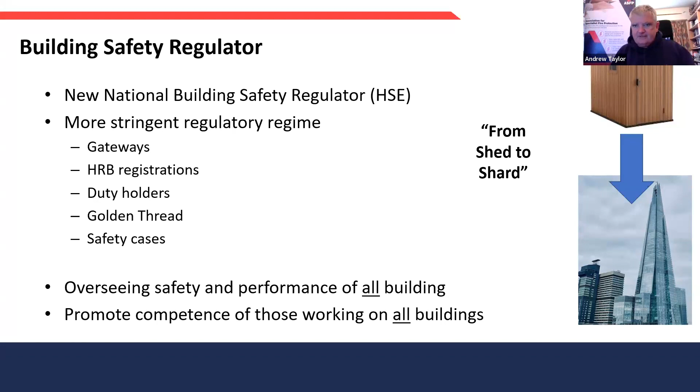The recent stuff government came out with in support of HSE was about the late teens of August. A lot of the secondary legislation that underpins the building control framework for new high-risk residential buildings has come out: the management of safety regs, the high-risk building procedures regs, and various amendments to building regs, all published with a view to going live as of the 1st of October.

They're also going to be putting new things in place for building inspectors, new provisions as we transition fully over to this new system.

So let's remind ourselves, and I hope none of this comes as a shock to you, what the Hackitt gateways look like. There are three key gateways that we have now.

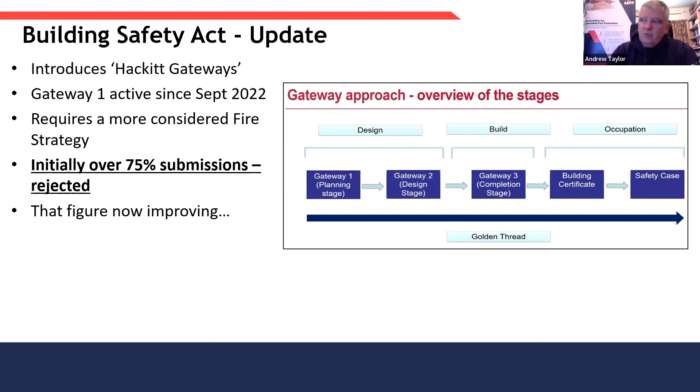So that's good. Moving on, what will now happen as of October is that Gateways 2 and 3 go live, remember this is for the new regulatory framework for high-risk residential buildings. Gateway 2 requires that full plans are laid down, so it requires a detailed design. With the conversation we had, this was RIBA stage, in effect RIBA stage 4.

So a detailed design needs to be done before you get permission to construct. Gateway 3 is a check that what you designed at Gateway 2 is what you built at completion, which is permission to occupy.

Now, the fundamental thing here: the fundamental legal requirement to build a safe building hasn't changed. How you build a safe building, what that safe building looks like, hasn't changed. What's changed is the route you need to go down and the method you go through the process to get to that safer building.

Okay, so there's no fundamental change to legal requirements, but what we're going to have to do now is do more detailed designs and lodge them with HSE to get through Gateway 2, and then have HSE involved in that conversation as we go through construction to get to Gateway 3. And the secondary legislation to make this happen was finally published on August 18th.

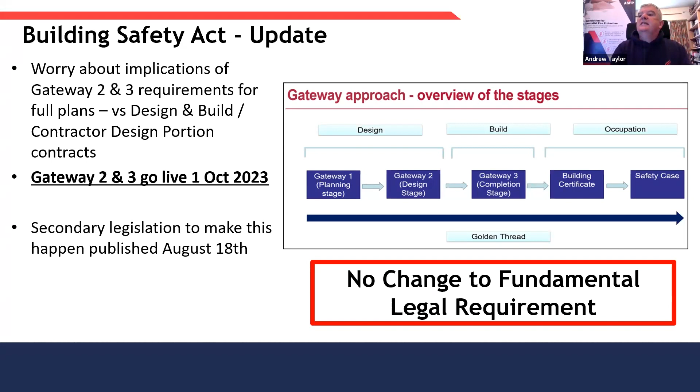I wouldn't necessarily suggest you go off and read the secondary legislation. It's quite detailed, it's quite dry. But HSE have published, and I often talk about this and recommend to people, HSE has a building safety web portal. They put a monthly e-bulletin out to explain what's going on and where we're up to with the process, and links to all their guidance.

And at the same time as government produced the secondary legislation, HSE produced this document here, an overview to Gateways 2 and 3. It's about a 20-page document, and it's a more interesting and maybe a better read than trying to go through the regulations themselves.

So Gateway 2 requires the client and designer to submit full plans for high-risk buildings, and once HSE has checked, and there's timeframes involved for that, you get permission to construct.

The construction phase needs to have an ongoing dialogue between HSE, client, and principal contractor. And there's a fundamental note here: major changes to your design, you have to stop and get them approved by HSE before you carry on with that construction.

And here's a couple of examples in the document here as to what might provide a major change in design: it's changing compartment size or changing your structural model.

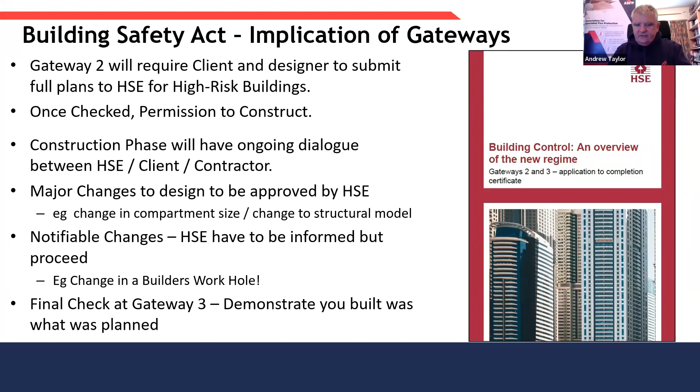Obviously, the less you change, the more you plan forward, therefore the less you need to change, therefore the easier you're going to get through Gateway 3. Sounds very simple, that. I'm sure it's not.

And that takes me to poll question 2: are you ready for Gateways 2 and 3? Let's see how that one fares.

So looking at that, it's a nice, fairly even split between not applicable, that we don't work on relevant buildings, and yes, they're putting steps in place to deliver the necessaries. Although 11% think we could have done with more notice, and I must admit, we could have done with this. It'll be interesting to see how this all evolves.

Interestingly, the Irish building regulatory system already has a lot of this in place, and it was actually put in place in 2014. But it took them a number of years to wash through how this would actually work and how this would unfold going forwards.

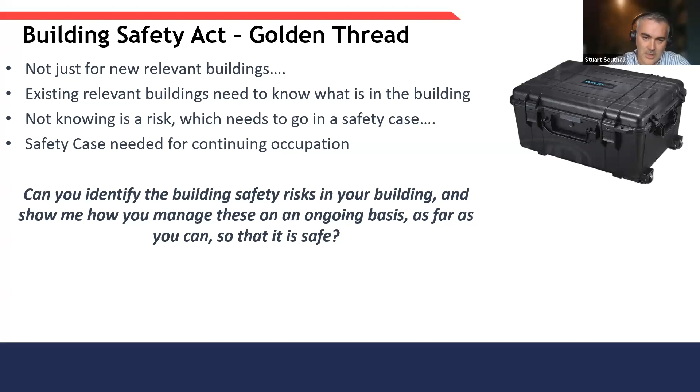Okay, so like we say, those first three points are the same. So the challenge: even buildings built in the 2000s have lots of missing Regulation 38 information. We've seen it with the schools, with claddings, etc. There are other issues out in the marketplace. Let's find that information out. Let's record it in a way that is accessible very quickly.

So if you've got that information available, you can make quicker and easier decisions to make buildings safer again. Where information is not available, you will have to show what you have done to find it. If you have problems with your safety measures, review and amend your maintenance regimes. It is important you keep this in mind as your building ages and equipment and technical progress develops.

People going in, putting cables through fire stopping systems that have been established - that kind of example, it's continual. The golden thread doesn't just stop when the building is built. It's a continual strand that will go out for the life of the building. Okay, next slide, Andy.

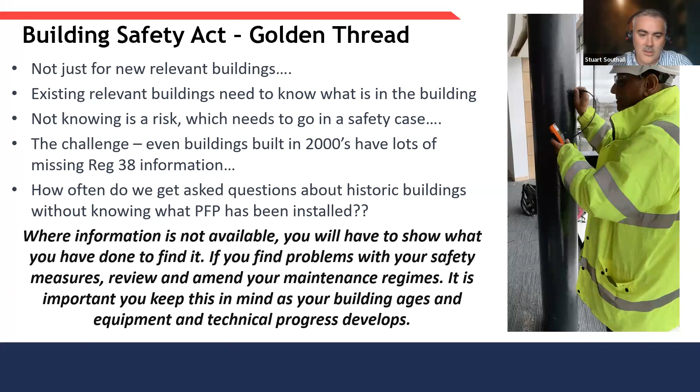Judith Hackitt worried that diverse digital systems will make this difficult to achieve. From discussions with ASFP members and our digital group, this is a concern: how do we get BIM to talk to other software, and how do we get design software to link up and record that information? There are lots of little packages doing a good job individually, but linking them all together will be difficult and challenging for the industry to solve. Still, I'm confident we can get there.

This highlights the need for inspection to be well defined in contracts and codes of practice. Are the people inspecting the buildings competent? How are they recording through that process, and when? What about product certification—what products are going in, when were they installed, do they have a lifespan? That information is critical, and so is knowing who is recording it.

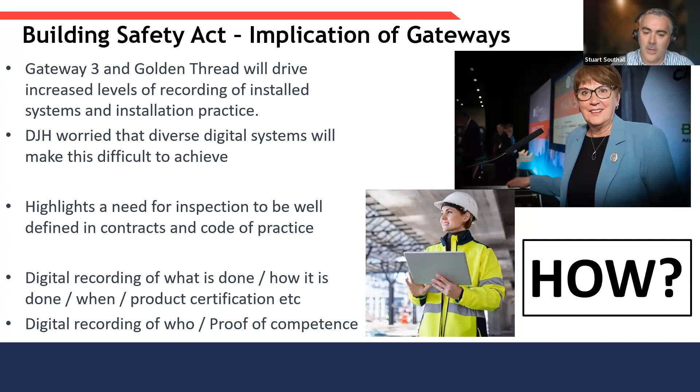That's what we're doing, that's what we're going to do at the ASFP. There's lots to cover here, and you'll have questions now, no doubt—I can see the Q&A kicking off with various different questions.

We've got a group meeting on the 4th of October with ASFP members—software developers, passive fire protection contractors, tier 1 contractors, and various technical advisors—getting them around the table, with some joining on Teams, to go through what software is out there, what people use, and how it links together.

We're going to develop a code of practice that gives a specification for design software, how it links to installation, inspection, and recording. Then we'll give clear guidance—this is how we think it should be used, this is how it looks to us—without naming specific manufacturers of software.

We'll give a mock example of what a perfect project looks like on the golden thread, from the initial planning right through to completion, and what that looks like as the years progress. It comes down to the HSE quote: assurance that the evidence captured of any aspect of the build is of sufficient quality to allow a decision on compliance for that aspect—gathering information so decisions can be educated and made, to make buildings safer.

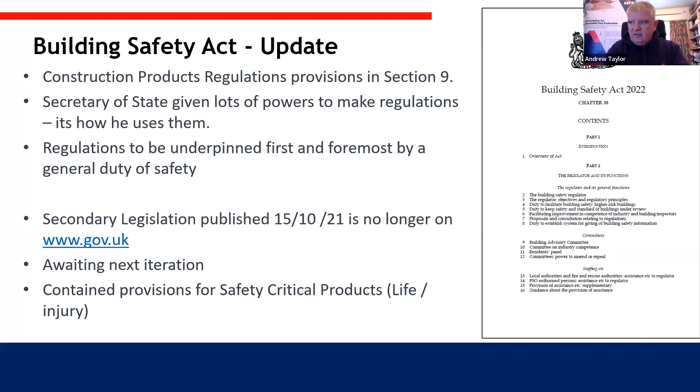Various reasons for that. So we know we're having a new construction products regulator. There is a challenge that enforcing things in the construction products regulation space is difficult—it's really complicated, not as easy for trading standards as fake cigarettes or fake trainers. As a result, and it's not just in the UK, the issue of enforcing construction products problems occurs across all of Europe.

There's very few CPR prosecutions, if any, because it's too complicated. But OPSS has come in as a new regulator now, which should help in an attempt to get around that. They have powers to demand rectification of problems, stop products being used to prevent further harm, and rectify things going back. But one of the key things with OPSS, they're only looking at product supply—for manufacturers, OPSS looks to your factory gate, and that's it. They don't go any further.

They can also look at misleading marketing claims. They'd started off as a shadow regulator already, looking into 6 key product areas. We've come across them because they've been looking at smoke control systems post-Grenfell—smoke control dampers, smoke control ducts—and we've been talking to them about that. They've also been doing fire doors, and obviously external cladding and insulation systems.

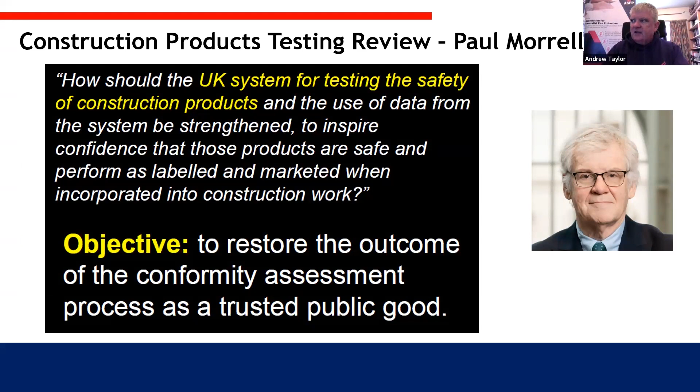When you look at what Paul said, one of the things he was tasked with was looking at how the UK system for testing safety of products works. Why was he asked that? To restore the outcome of the conformity assessment process, so that the public would trust that a product is safe and will perform as labelled and marketed. But the problem is that, of course, the system we have isn't necessarily a system for testing the safety of construction products.

A lot of the system that we have, and the European system that we've descended from recently, is aimed at making a common understanding and common expressions of product performance that can be used across Europe. So a manufacturer from France can test a product in Spain and sell it in Germany, and they're all speaking the same language and understand one another's terminology. The European system we're based on is more about freedom of movement of goods than it is about safety.

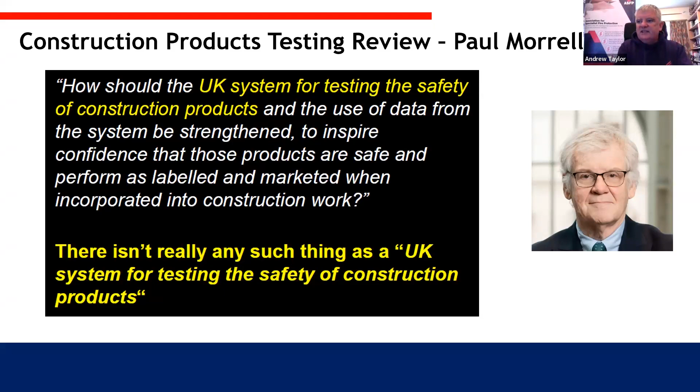One of the issues of the CPR is that, as it stands, the way the European system works at the moment, it places the requirement to determine the safety of a product on the project, and not necessarily on the manufacturer or the approval body. It's why we have European technical assessments now instead of European technical approvals. It's an assessment, and somebody else decides on how you would approve it, whether you would approve it. So one of the issues that Morrell and Day highlighted is the over-reliance on the European CPR for safety of products, where that isn't necessarily its primary function.

We've mentioned failure of market surveillance and no enforcement. It's too complicated, but we've now put OPSS in place - let's see how that works. Key one here: too many AVCP systems. It's too complicated, says the little picture - there's too many acronyms involved in this. AVCP is the attestation and verification of constancy of performance.

What a lot of people don't realize is that not all CE marks are created equally. There are different levels of testing and assessment and assurity that you need to go through to place a CE mark or whatever on a product. Many passive fire protections are not covered by designated standards, so there's no mandatory product standard to work with them. And of course, bad manufacturer behavior is hard to control.

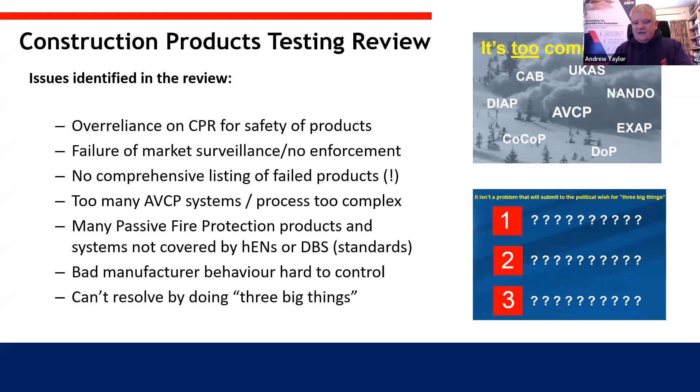One of the things that Morrell and Day highlighted is government likes the concept of three big things - you know, we've seen the 3 bullet point things on the lectern at Downing Street. They like that. Well, this isn't necessarily going to be easily resolved with 3 big things. I've mentioned AVCP - let me explain a little bit more about what AVCP means.

Different product families have different levels of AVCP. It starts all the way at the bottom, where we call system 4 or level 4, where basically the manufacturer samples the product, tests the product, decides the product's good enough, and sticks the necessary marks on it, and keeps a file that says I've done all this work and I think it's all right. Stick the CE mark on it, stick the UKCA mark on it, and away you go. Now, there aren't any passive fire protection products at level 4, although we do have some things that have product performance requirements at system 4, and we'll talk about that in a minute.

The bulk of what we do sits at the moment at what's called system 1. The manufacturer is responsible for his own factory production control, making sure the product is made properly and the records are correct. But when you come to testing and assessing the thing, the laboratory or notified body comes in, witnesses the manufacturer or takes stuff off the shelf and samples it, tests it and assesses it. The manufacturer conducts a production audit at the start of the process, and the notified body also conducts a production audit at the start of the process, and does regular follow-up audits to make sure that nothing much changes.

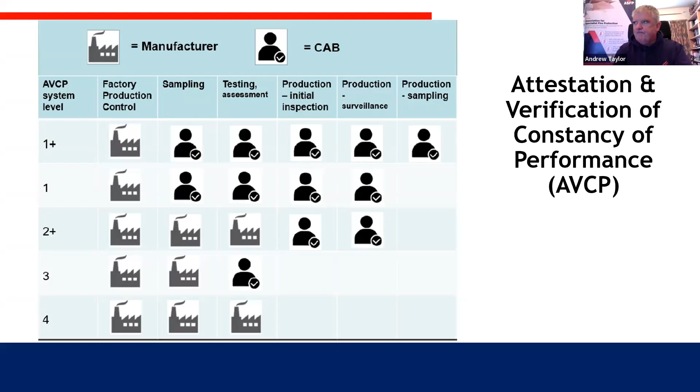So the recommendations we should be looking at, according to Paul, is that it's too complicated. Simplify it. And you know what? Can we increase the rigor? Can we get rid of System 4? Can we get rid of System 3? Can we get everything to System 1 or even System 1+? Can we educate people about what the different AVCP systems are? I hope you consider yourself educated.

So we're looking now at devising a certificate so that we produce a standard template and a standard format and a standard set of documents for manufacturers. There's going to be more information required - manufacturers are going to need to put more information into labs when booking a test to prove that we aren't shopping around for the best possible result.

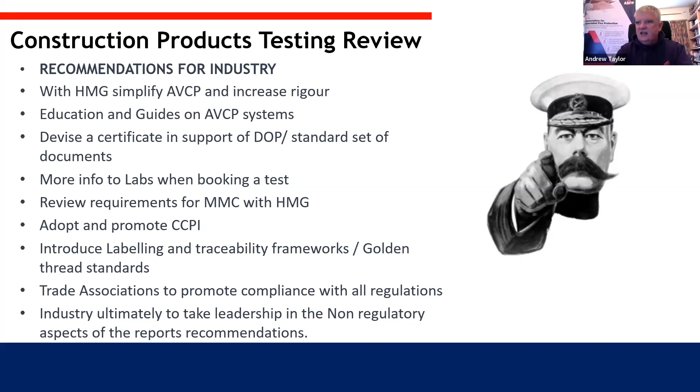Paul suggested we adopt and promote CCPI - we're going to talk about that towards the end. And there's all sorts of other stuff about labeling and traceability. So the industry is going to have to do a lot of this because government doesn't want it to be for them to do. There's other stuff government can do - it's generally quite complicated. Some of it government's already done, like the new regulator at OPSS.

The interesting one there - results are too complicated to understand. Government should simplify by using classification. That's going to be an interesting one and subject for another presentation. We're talking to government about that. We're a bit worried that using classification can be too simple, and it's a European nut that's quite hard to crack and doesn't necessarily reflect end use conditions.

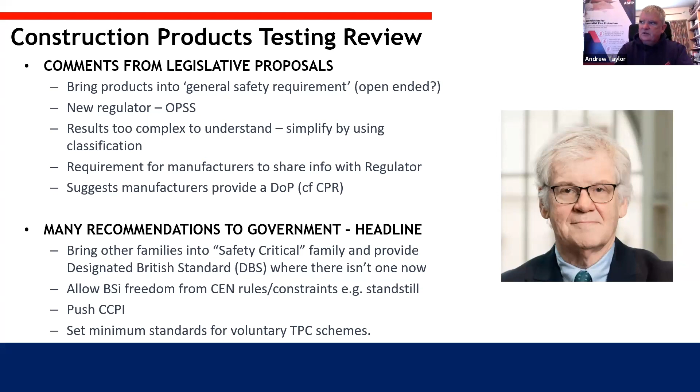There's a requirement for manufacturers to share information with the regulator - that's coming - and manufacturers providing a DOP, again, that will be part of the whole revision of construction products stuff going forwards. So there's lots of requirements for government, and lots of it's very, very complicated. But again, it comes back to government to simplify and strengthen the AVCP system. The recommendation is to use System 1 Plus for safety critical products, which is actually a higher level of conformity assessment than current third-party certification.

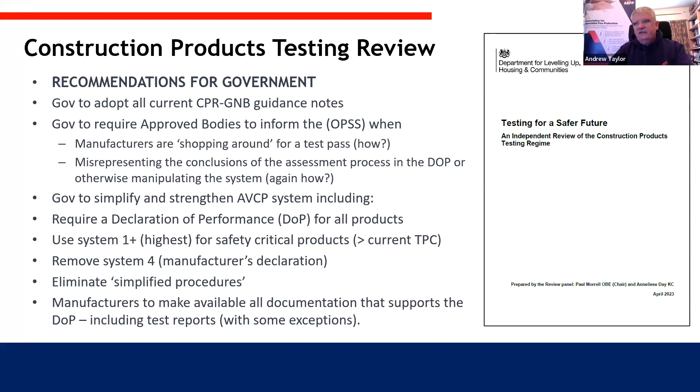And it's quite a lot higher than some of the systems that some of the product families only go through, which is AVCP 3. Manufacturers are going to have to make all the documentation available. So there's a lot of recommendations there from government, but we think the main aim is going to be a strengthening and a driving to higher levels and better systems of attestation and verification of constancy of performance.

For those of you that were there, we did a seminar last week in London, and Niall presented a critique of the Morrell and Day report. During the conversations, Chandru was there from DLUHC and said, effect of - go on then, well, what would you give? Here's the challenge, give us what should we do? And Niall's suggestion - we couldn't do it in 3, had to do it in 4.

Let's have one. At the moment, we're potentially looking at 3 regulatory frameworks for construction products: safety critical, general duty of safety, and CE UKCA, which we'll come on and explain in a couple of slides.

We should adopt one AVCP level for PFP products, ideally System 1, or even better still System 1+. We should use the third-party certificate methodology, but harmonise it and modify it, upgrade it to 1+, and again regularise and harmonise the legislation so that we have one bit of legislation for construction products.

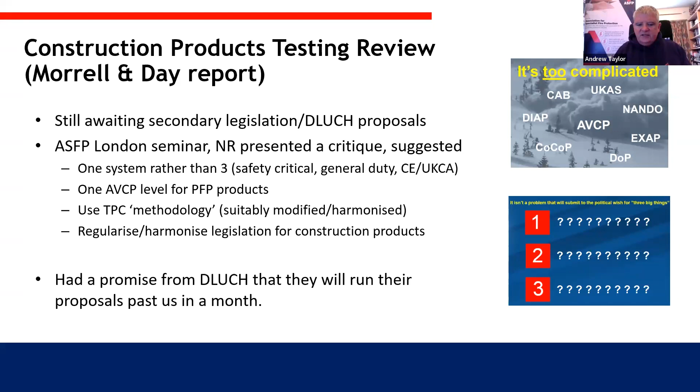And we're waiting - DLUHC have said they will come back. They have undertaken to come back to us and run their proposals past us at some point in the next month. That takes me on to question 4. So question 4 is, what do you think we should do with PFP products?

Increase all to System 1+, leave all up to System 1, which is the one without the regular annual every other year audit testing by the third-party laboratory, or leave systems as they are at the moment, where some products may well be - some of the insulation products and some of the gypsum boarding and flexible wall systems are System 3.

I'm going to have to get a move on because I'm going to be overrunning here. I've still got another 10 slides to go, and we've got about 20 odd open questions.

Okay, here we go. Excellent. Thank you very much. So, increase all to System 1+ 45%, all up to System 1 38%, 17% leave as they are. That's really useful, helps us when we're discussing these things - share that with DLUHC and point out where we're up to and what our audience thought. Excellent. Super. Okay.

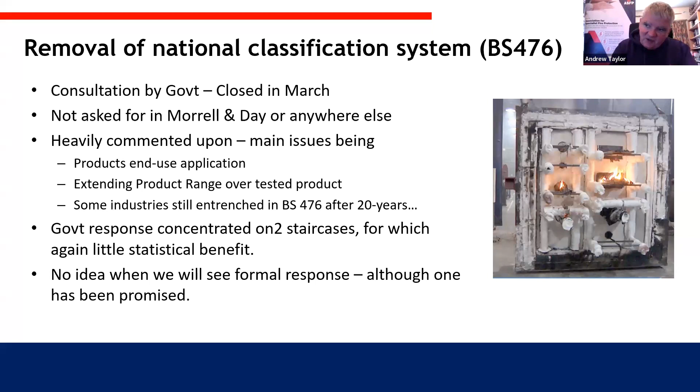One's been promised to us at some point, and it wouldn't surprise me if the new construction product regulation framework under the Building Safety Act, and the response to this removal of BS 476, and the response to the next slide - implications of Brexit and CE to UKCA - doesn't all get rolled into one big response, so that government can deal with these three issues in one.

It would make logical sense, and that certainly was the message we were getting last week. There's no point doing one of these and then having to revisit again for the other, and having to revisit again for the third. I don't know if you're all aware - CE marking, UK government policy was to end CE and switch to UKCA.

The end date was the end of 2024 for all stuff, and the 30th of June 2025 for construction products. We had an announcement early August, about the 1st of August, from government that CE marking will, in effect, be able to be used in perpetuity, with a reminder that CE marking is a freedom of movement mark and not necessarily a safety mark. However, that's what the government failed to mention back in August.

It doesn't necessarily apply for construction products. So where we are today is that the government policy is still that UK CE marking and the switch to UKCA for construction products will end on the 30th of June 2025. One of the challenges here is that there are different end dates for different regulations, and therefore products that are caught up in more than one directive can get very confused.

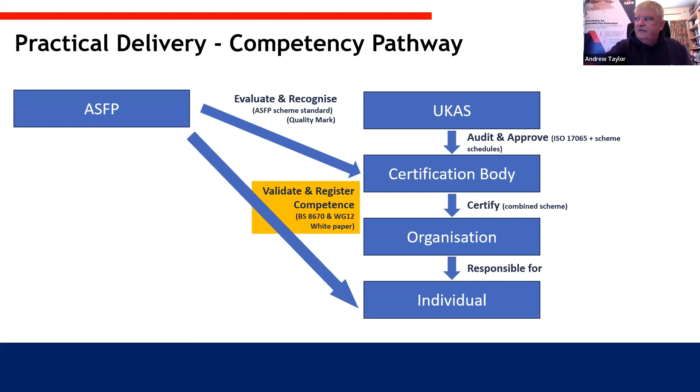To that end, we're generating a web-based inquiry form that shows the evidence and records completion. It's nearly ready to go live at some point in the near future once we've got more of the activities written down, so you'll be able to go on there, see what training, skills, knowledge, experience and behaviors you need to demonstrate, and record yes or no whether you've got that.

One of the recommendations from both Hackitt and Morrell was something called CCPI. As a reminder to manufacturers, the first tranche of companies has now registered and joined the Code for Construction Product Information, which is a way of verifying that your marketing and technical literature is correct and appropriate for your products. The first half dozen companies are out there, including a couple of ASFP members. I can imagine this will gain lots of traction, and at some point in the future it will become compulsory, no doubt. It's brought to you by the same people that brought the Considerate Constructors scheme, so please sign up and get involved.

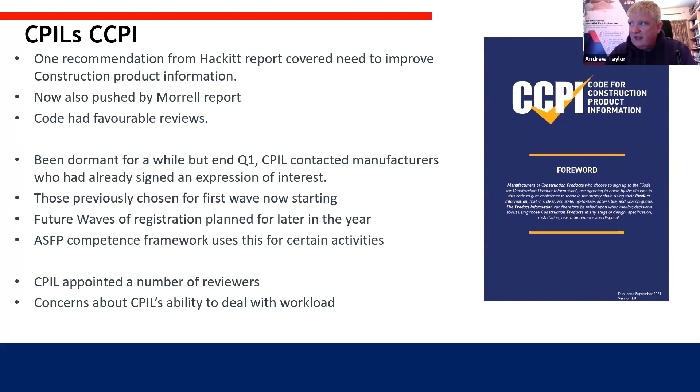That's the end of the presentation. Obviously, we're going to have to collaborate - no one has all the answers. My suggestion is that there's going to need to be better and more considered design, maybe simpler and more thorough designs. We know that manufacturers are going to have to test and certify the relevant things, because there's a bit of a disconnect between what is designed, what is required for a building, and what the test standards actually cover. One of the things ASFP can do is sit in the middle and try to bring the two back together.

Please design it better, and once you've designed it better, construct what was designed - don't change it. Because if you do change it, you're going to end up in a situation with lots of back and forth conversations with HSE. Record and keep the records, and once you've done it, you need to maintain your PFP in place to prove that your building remains safe to occupy and inhabit.